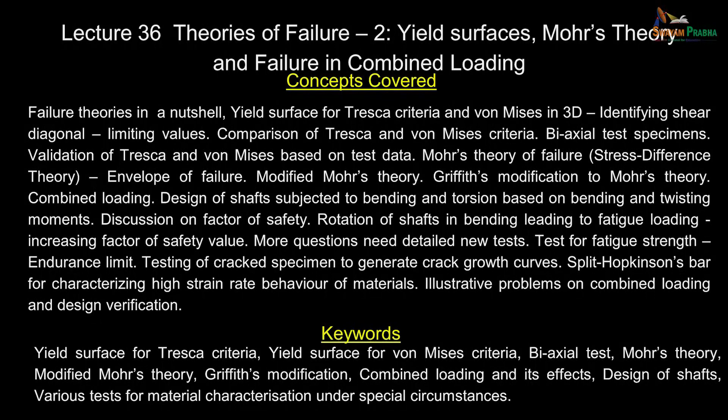Let us continue our discussion with theories of failure. You should recognize that these theories basically developed from a simple tension test. Later, people have conducted experiments on geometries where they could change both sigma 1 and sigma 2, then verified it satisfies even in a biaxial situation.

As far as brittle materials are concerned, we have looked at the maximum principal stress theory. Once you go to a brittle material, the ultimate tensile strength becomes important. There is nothing like yield strength. The material does not give you any warning, it simply fractures. And we will not try to apply maximum principal stress theory to a ductile material.

One of the very famous theories, developed very early, was the Tresca yield criteria. The way you will have to appreciate this theory is that we are monitoring what happens to the shear stress, written as sigma max minus sigma min divided by 2. When this reaches a critical value in a tension test, you go only up to sigma ys because you are pulling the specimen, and you want to see when yielding has taken place. You use that information and limit the shear stress at that stage to be the permissible one.

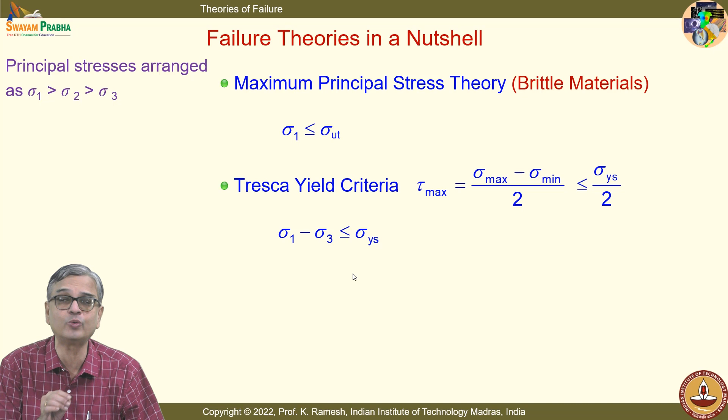So rather than sigma max minus sigma min, if you write it as sigma 1 minus sigma 3, even when both principal stresses are positive and both are negative, when sigma 3 is 0, you will never make a mistake in the calculation.

We have also seen the von Mises yield criteria, which reduces to sigma 1 minus sigma 2 whole square plus sigma 2 minus sigma 3 whole square plus sigma 3 minus sigma 1 whole square, less than or equal to 2 sigma ys square.

I have also said that the von Mises yield criteria comes basically from distortional energy theory. Later, there is the octahedral shear stress that was monitored by Nadai, who showed that results from octahedral shear reaching a maximum and distortional energy reaching a maximum reduce, for calculation purposes, to the same basic equation. This is a verification that the yield criteria has more justification, because you have approached the problem from two different directions, and both give identical results.

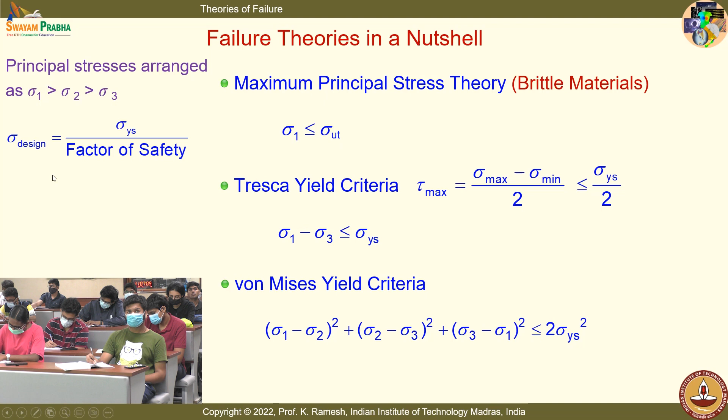Finally, when you do the design, nobody even goes anywhere near this yield strength. You have what is known as factor of safety, so you have a design strength. So all of these equations will change.

Sigma 1 should be less than or equal to design strength; sigma 1 minus sigma 3 should be less than or equal to design strength; and sigma 1 minus sigma 2 whole square, the final expression, should be less than 2 times design strength square. One of the most challenging aspects in design is how to estimate this factor of safety. There are multiple considerations that go into it.

We will discuss some of the aspects in the class today, and some other aspects when you do the machine elements course, design of machine elements course, you will have more comprehensive development on how to decide factor of safety.

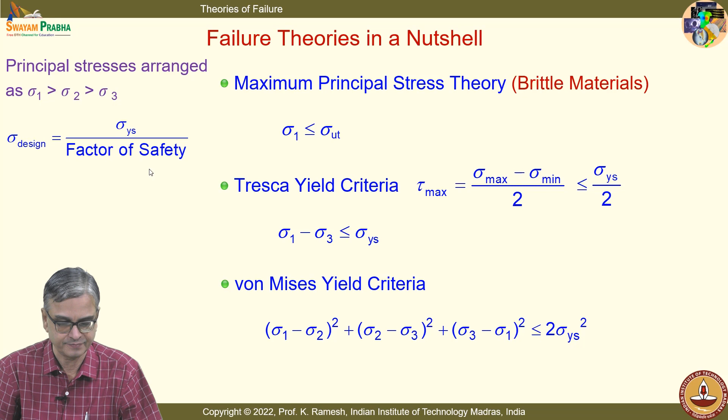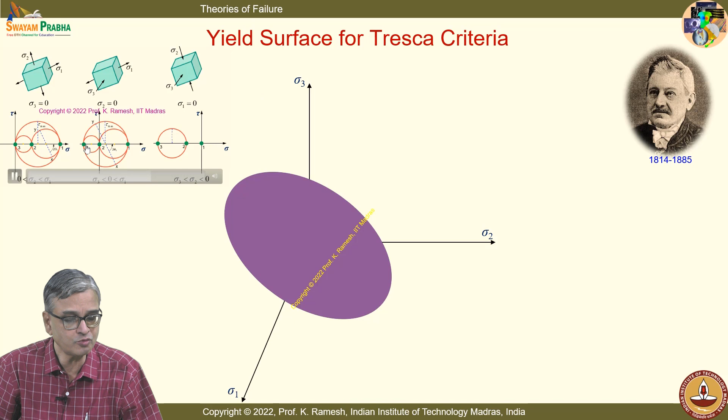You should recognize that this was one of the earliest criteria, developed in 1864. I have also been cautioning that when I have this, can I call this the maximum shear stress? You have to look at sigma 1 minus sigma 3, only that gives the maximum shear stress. This becomes particularly important when both principal stresses are positive or negative, like what you have here.

You normally ignore 0. Don't ignore 0. 0 is very important, and that is a contribution by Indian mathematicians. And with all your environment now, you want to have 0 emissions. So 0 is very, very important.

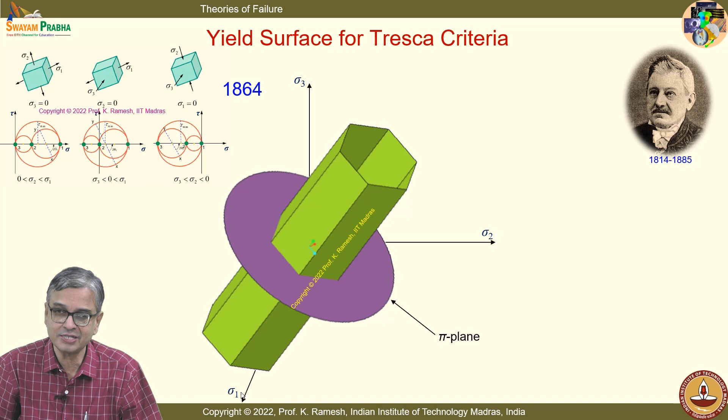One better way of understanding and implementing the Tresca criteria is to use it as sigma 1 minus sigma 3. We have also seen that you can have what is known as the pi plane, which, in the principal stress reference sigma 1, sigma 2 and sigma 3, takes the form of a hexagon. If you want to draw this, you can appreciate that by doing a simple tension test, I can find out this point.

I can find this because it goes to sigma ys. I can also keep the specimen horizontal and apply it, and I can get this point. I can also have a provision wherein I do a biaxial test - we will see the biaxial specimen. I can apply equal values of sigma 1 and sigma 2. Even in that case, because sigma 3 is 0, from the strength of this you will again get sigma ys divided by 2 as the maximum shear stress, so I can get this point. So you can imagine how the first quadrant is obtained as a limit from our simple understanding of the tension test.

And the tension test also says something about the magnitude of the shear stress. When sigma y reaches in the tension test, from your Mohr circle you can find out what is the maximum shear stress. Once you have a pure shear stress state, you can always look at it as a combination of tension and compression. We have repeatedly seen this - we used it for establishing the interrelationship between Young's modulus and shear modulus. And when we wanted to paste a strain gauge on a shaft to determine torsion, we utilized that knowledge because a strain gauge can measure only axial strain.

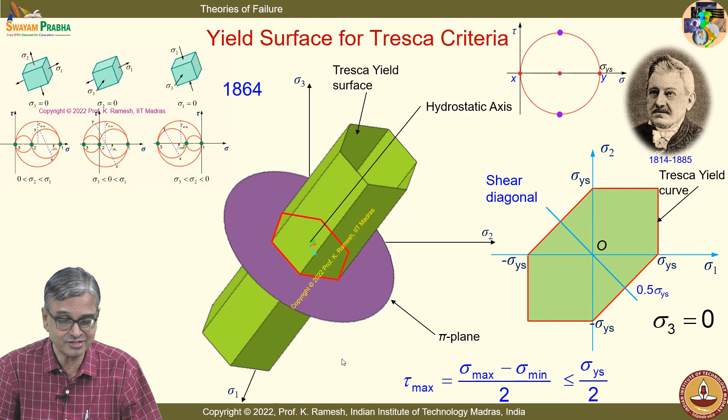We will now go and see how you get the von Mises yield criteria in a similar three-dimensional fashion. That is very interesting to see - you will appreciate how interesting nature is. And the moment you get into von Mises, there are multiple contributors. It started in 1904 by Huber, 1913 by von Mises, 1924 with a better explanation from Hencky, and then in 1937 an altogether different approach by

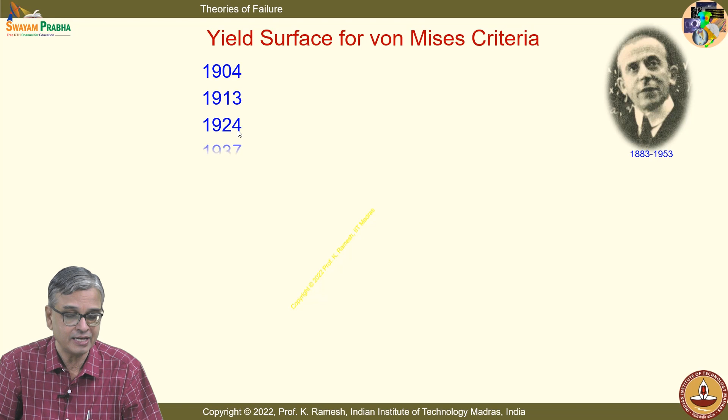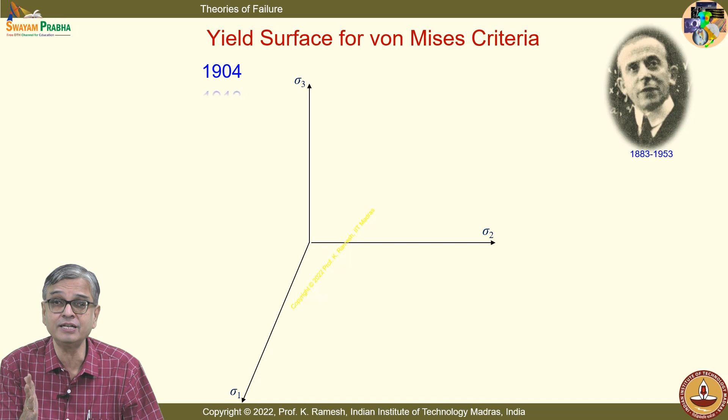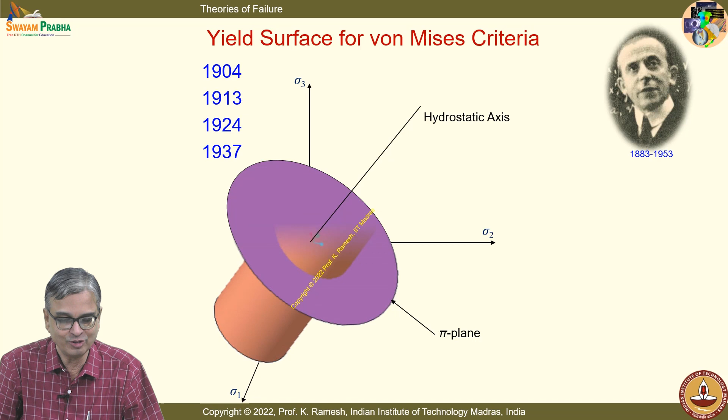Árpád Nádai, who concentrated on what happens to the octahedral shear stress. So you have multiple contributors, and if you go to historians - see, historians always go back and find even a trace of that knowledge related to the modernity, they want to give the credit to him also. You will be surprised, Maxwell also thought about a theory similar to this. And Maxwell you understand mostly in electrical sciences. In those days it is only physics - all branches of physics

come under one umbrella, and you find this von Mises yield surface is a cylinder like this, and the curve is a circle, in the sigma 1, sigma 2, sigma 3 plane. But if you put it in the sigma 1, sigma 2 reference axis, it gets elongated and takes the shape of an ellipse. So if you plot this, if your stress state is within this ellipse, no yielding is possible. If it is on the boundary or exceeds it, then yielding is definite in a given material.

See, all of these people have conjectured based on a simple tension test. You should never lose track of this. You can justify that these theories are useful only when you conduct complicated experiments, plot the experimental data, and verify whether it matches with that. We will also see that.

Now the next question is - I have shown von Mises independently, I have also shown Tresca independently, and you have seen the shapes. It is a hexagonal cylinder in the case of Tresca, and it is a circular cylinder in the case of von Mises. How do these two compare? That is also very interesting to see.

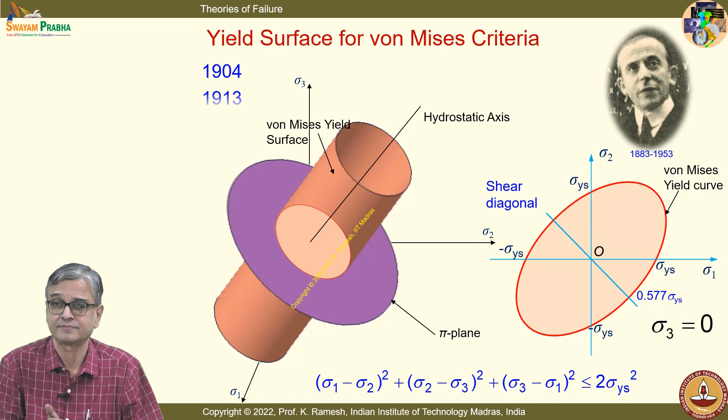Suppose I plot these two theories in one reference, you have a very interesting geometrical appearance. You have the von Mises cylinder just enclosing the Tresca yield surface. It is very interesting, and it is slightly different. From a computational point of view, Tresca was very easy to do.

You should imagine, if you have a slide rule, how will you compute? You can't compute sigma 1 minus sigma 2 squared plus so on and so forth as in von Mises, but with Tresca you can definitely find out the difference.

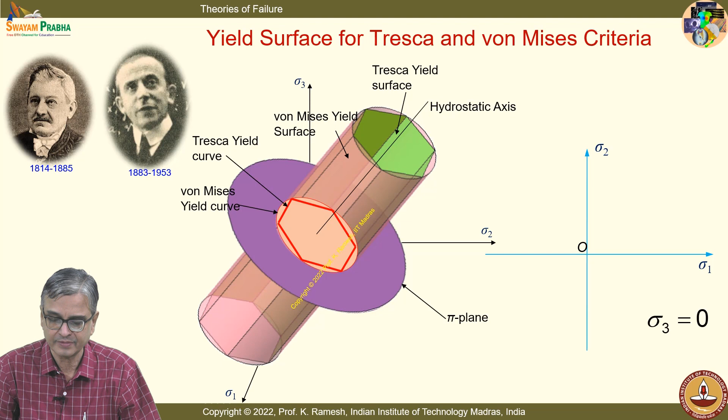So, you should also give credit, it was one of the earliest theories. I have this as a circle enclosing the hexagon, and when you see it in the sigma 1, sigma 2 reference, when sigma 3 is 0, I have this elongated hexagon, enclosed by the von Mises ellipse.

The idea is, in a real life situation with complicated loading, if you find the principal stresses, the combination lying within this elongated hexagon is predicted by Tresca, so you will not reach yield. Von Mises is slightly relaxing this, allowing a small increase, and within that, if your point lies, you have not reached yield condition, meaning you are safe.

So, this is looking at the extremum value. When you go to design, you never go near this unless you want crash protection, where you want the occupants in the car to be protected. After the accident, you want your crash bar to go out of shape and you should be in good shape, so it should absorb maximum energy. There you allow failure by yielding. In none of the practical applications do you go anywhere near this.

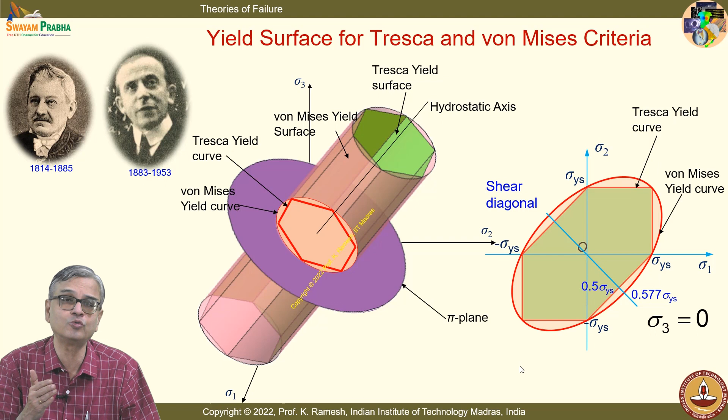Now we will also see the shear diagonal in one diagram. You will see the von Mises theory gives this value as 0.577 sigma ys, whereas Tresca gives this as 0.5 sigma ys. So, even if you do Tresca analysis, you are conservative, your failure will not happen.

These days of optimization, working on space technology where weight reduction is very important, people want to do analysis to the extent they just have material to do the intended task. That means your mathematical modeling should be very close to what is anticipated in actual conditions, and you want to optimize, you want your light helicopter. Initially they make a helicopter to fly, then they try to find out where they can reduce weight. Same is the situation for landing gears.

We have seen photoelastic coating employed to reduce weight. So, when learning stress analysis, it is not only the maximum stresses that are of concern, even the minimum stresses you want to keep at a reasonable level so that the weight of the structure comes down. So, it depends on the requirement.

So, remember this, failure theory is a substitute for good test data. If I have good test data, I would rely on that.

In the early development of jet aircrafts, I said you had big windows, and even Queen Elizabeth traveled in that, and the DGCA of US said these big windows are dangerous. There have been explosive failures of Comet aircraft. It happened even when it was taking off from Calcutta.

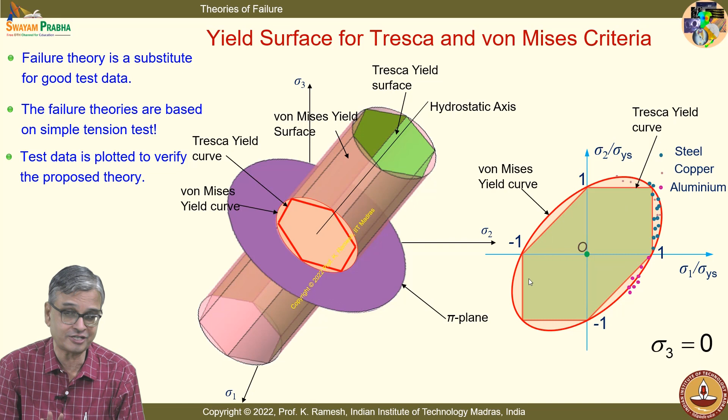None of you have told me what happens if you apply internal pressure. It is a true biaxial stress state when the ends are closed. When the ends are closed, I have PR by T and PR by 2T. Suppose I also apply axial tension, I have control on modifying sigma 1 and sigma 2. When I want to perform the test, I want to do it for a variety of combinations. Only then can I say that I have exhaustively analyzed it, otherwise not.

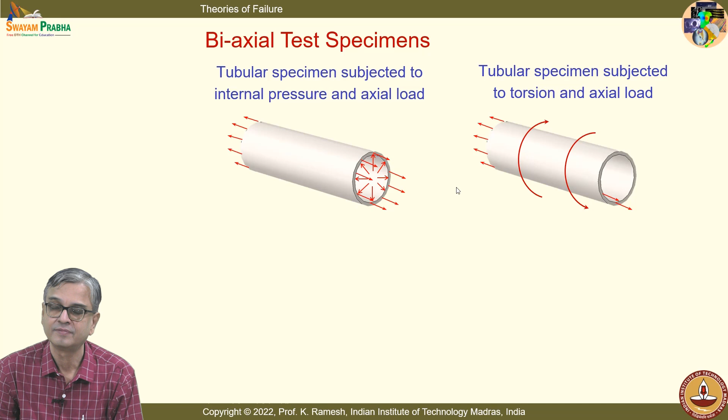You also have a tubular specimen subjected to torsion and axial load. And you also have the possibility of using a simple elliptical sheet subjected to internal pressure.

The best way to do it is a cruciform specimen. I have complete control on what I want to do with sigma 1 and sigma 2. Your test section is the inner core of the specimen, and the design of the fillet are design issues, a very subtle point, because the specimen should not fail either at the grips or at the fillets. It should fail only in the interior.

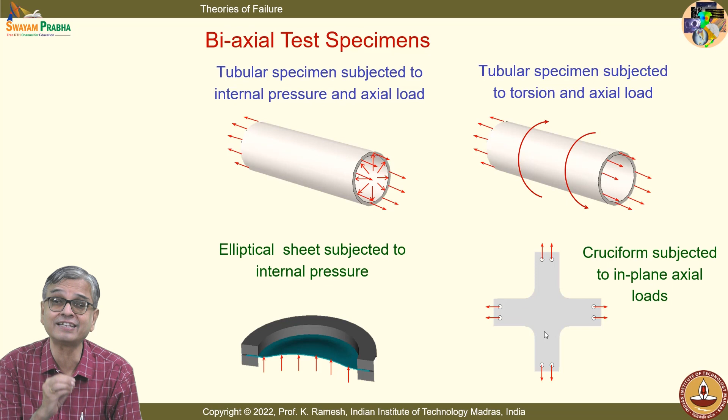People have also designed new specimens so that you can push it and find out whether these theories are valid. So you can feel safe, scientists have not had a dream and then said you follow this theory. It is all tested, verified, and reconfirmed by several bright minds over the years.

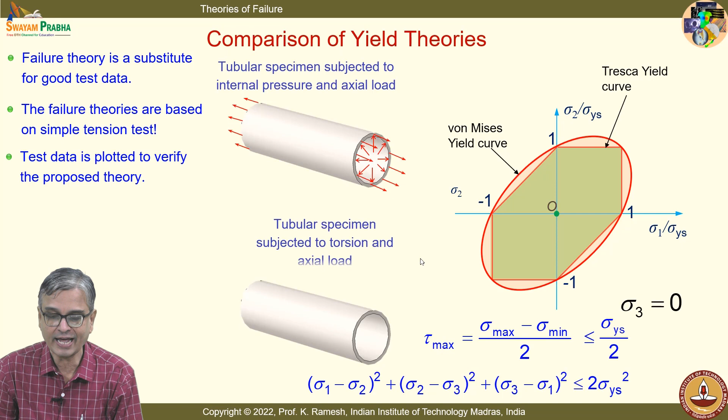So you have test data from this. I just want to give you that if you want to see what happens in the first quadrant as well as the fourth quadrant, you will have to get some tests done, very carefully, very expensively. Then you populate the data and satisfy yourself that these theories are a good enough approximation to carry on with routine design.

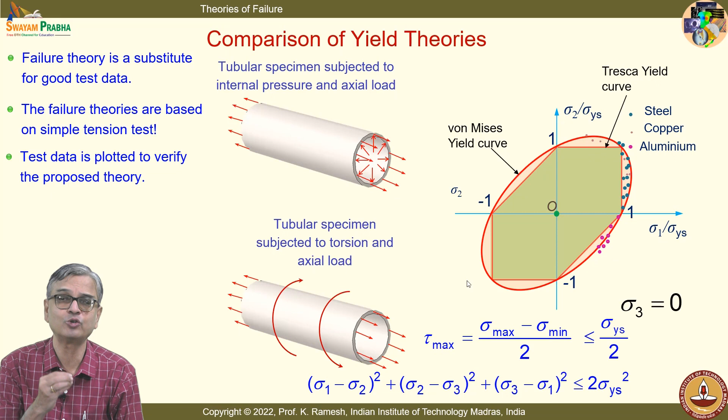For any special purposes, people do have final test rigs, very complicated, whether it is an aircraft, a car, or even a train, because India is now developing the Vande Bharat, which was known as Train 18. They have to have test rigs to test the complete bogie for several field conditions.

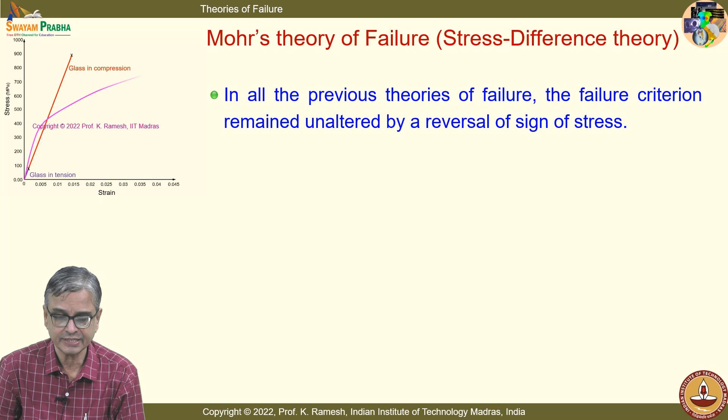We have always observed that when you have a brittle material, it can have a different compressive strength and a different tension strength, and the difference is very large. All the previous theories we looked at had a failure criterion that remained unaltered by a reversal of sign of stress, because whether tension or compression, the yield strength for most ductile materials is very similar, with no major difference. For brittle material, the yield stress is considerably different in tension and compression.

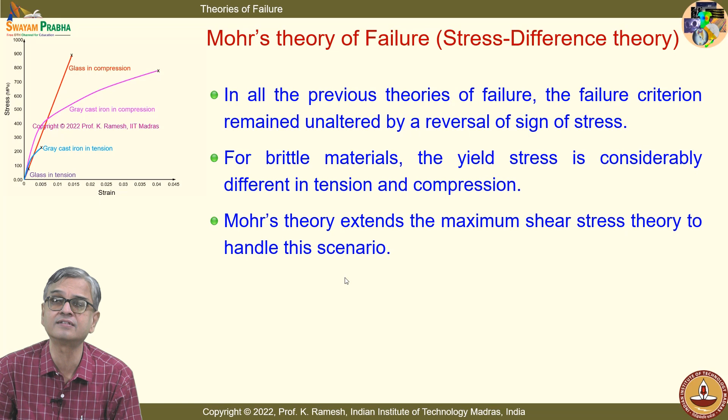So the Mohr's theory extends the maximum shear stress theory to handle this scenario. It was developed by Coulomb in 1773 and generalized by Mohr in the 19th century, so it is called Mohr-Coulomb theory as well. You call it Mohr's theory, but if you dig into the history, people say Mohr-Coulomb theory. After the development of fracture mechanics, Griffith, a very famous name in fracture mechanics, also contributed to this theory of failure.

So all these failure theories have a history. They were not developed in one day. They were proposed, verified, modified, and generalized by several scientists down the line.

When we looked at the maximum principal stress theory, we said it is credited to Rankine. Rankine's period is between 1820 and 1872, whereas Mohr's theory of failure is from 1773. That means what Coulomb said was not very clear, so it was generalized by Mohr, that is why you call it Mohr's theory. That happened probably in a period later than Rankine. Otherwise, logically, you should have given credit for the maximum principal stress theory as the theory for brittle material. People were not comfortable with this. That thinking was there even before Rankine. That is what you learn from historical records.

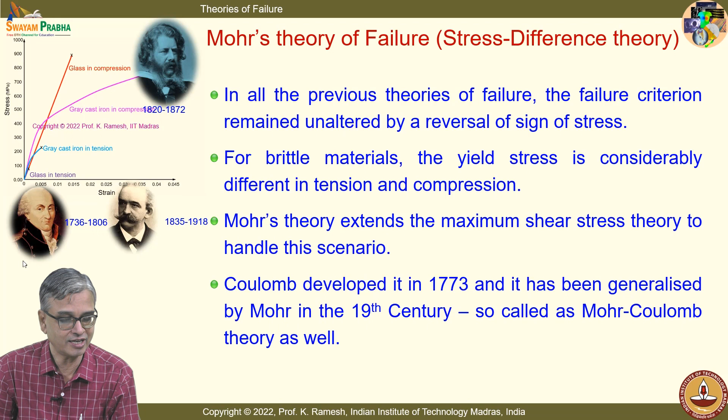And how do I plot this? If I want to plot it, I must bring in the difference in magnitudes, and what is recommended is you do a test in simple tension and then find out the Mohr circle.

You do the test on the brittle material with pure shear stress state, find out the Mohr circle, and you find out another test where you have the maximum compression. You only compress the material and draw the Mohr circle, and the envelope of all these Mohr circles tells you what failure can happen in a brittle material.

For all the previous theories also, you can draw the Mohr circle and find out this envelope. Those envelopes are simple envelopes. And if I want to plot it like what I have done in the case of Tresca and von Mises in sigma 1, sigma 2 space, I have to draw it on the screen, so I have to modulate my sizes.

If I have a simple maximum normal stress theory, it would be like a square like this. In the first quadrant you have this, and the third quadrant, which talks about compressive stress, will also be of the same size. But your brittle material does not have the same tensile strength. Compressive strength is very, very high, 13 times higher. So if I extend this...

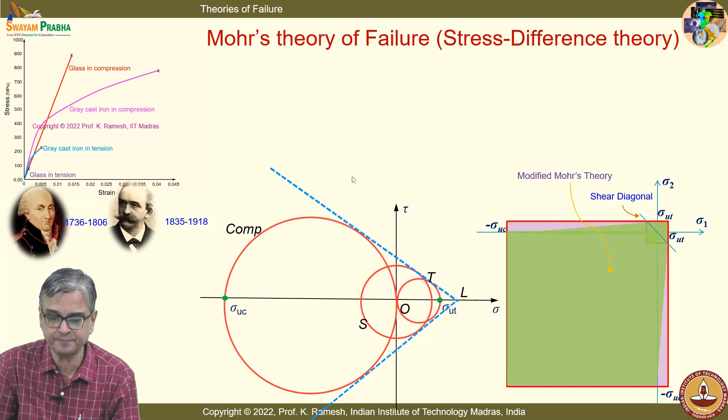So as long as your stress state lies within this zone, a brittle material will be safe. And people working with brittle materials, such as rock, have worked extensively on this.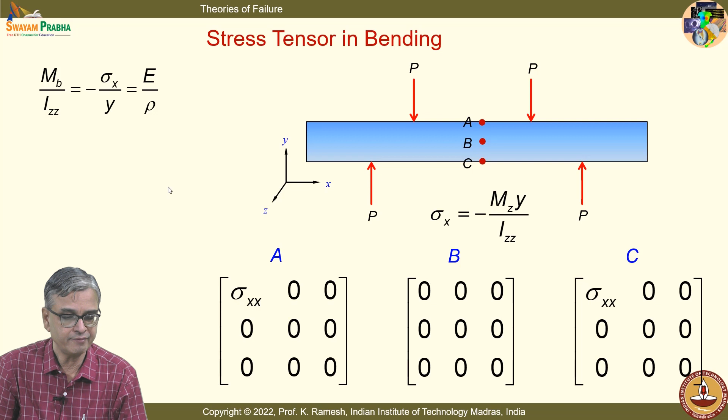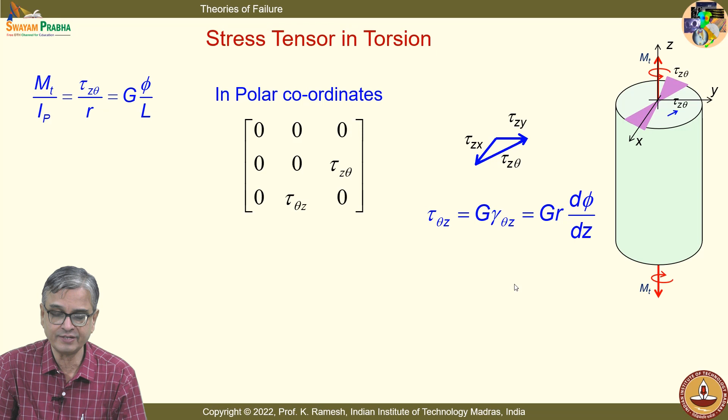And we have also seen stresses in torsion. The shear stress varies tangentially and varies as a triangular distribution. I can write it in polar coordinates as tau z theta, z theta, tau theta z. I can also write it in xy coordinates, xy z, calling the axis z. So I have this tau z theta resolved into tau zy and tau zx. In Cartesian coordinates, I have the stress tensor like this.

I have said even a simple atta chakki problem, let us see what forces come on the shaft. I have shown a generic shaft. This is not the shaft used in atta chakki because it is hollow and tapered and so on.

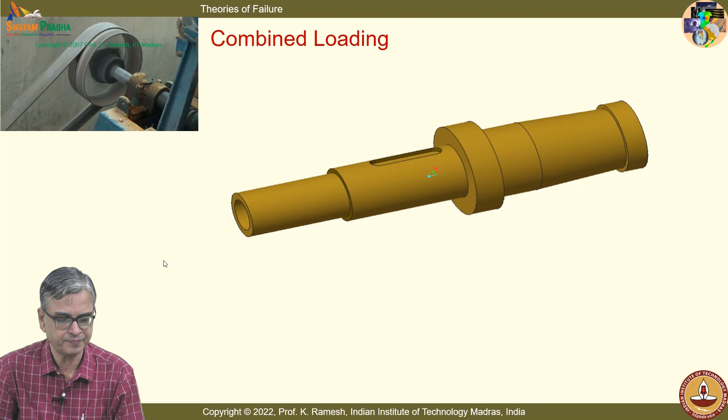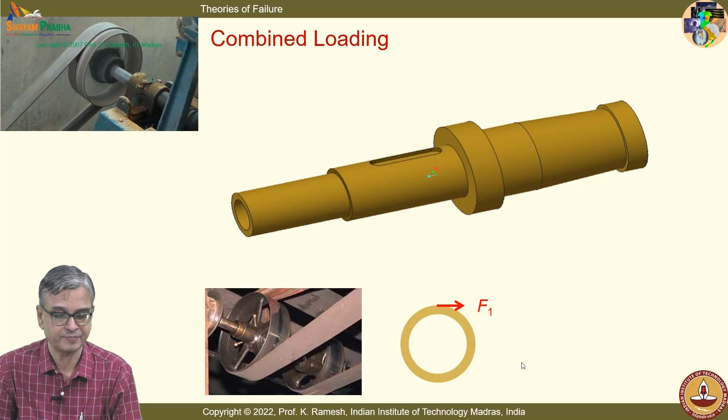When I have a belt drive, recollect what you learnt in your rigid body mechanics course. You have tensions T1 and T2, and this essentially introduces only a twisting moment on the shaft.

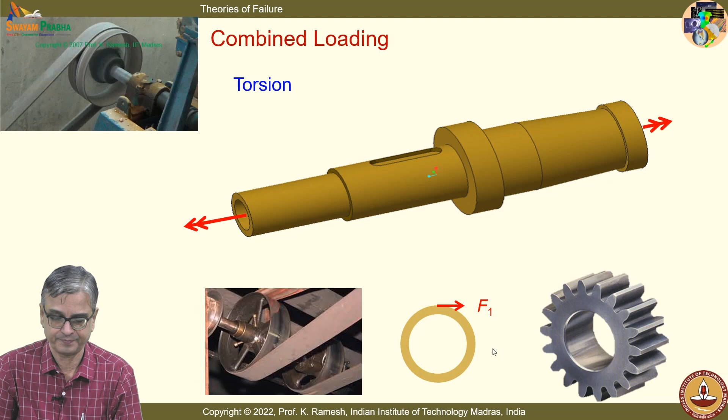Suppose I have a spur gear mounted on the shaft. With a spur gear, you have a pressure angle and the load is transferred along the pressure angle, so I will have a horizontal component causing twisting and a vertical component that adds up to bending of the shaft. Or if in the atta chakki I have a bearing, it will also give a reaction.

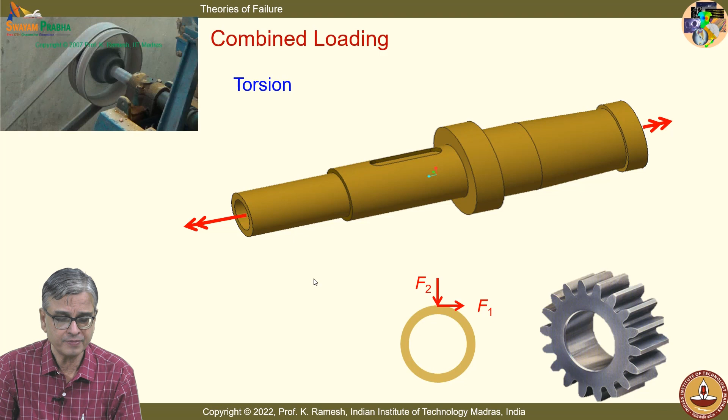So the shaft will be subjected to bending loads. Torsion and bending loads are very common in a shaft, but we have studied them separately. That is how we develop the subject.

Suppose on the shaft instead of a spur gear I have a helical gear, needed to take out power and operate something else. This helical gear will also have an axial component. So I have torsion, bending, or tension and compression. In real life, even a simple down-to-earth problem may have a combination of these loads. You never have one unique loading, but while learning the subject, you learn them independently.

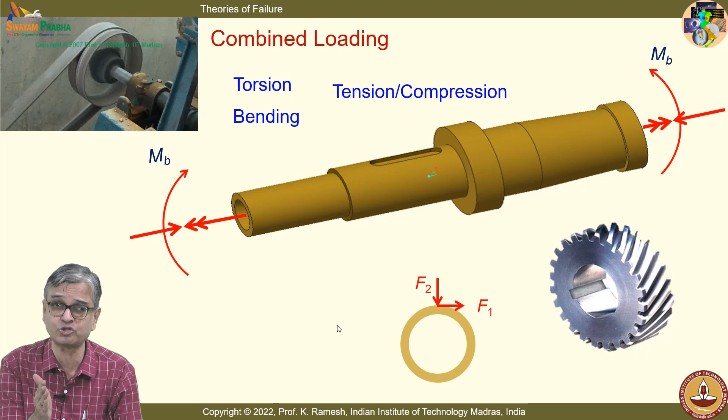And we said we are working in linear elasticity. So in linearized elasticity, I can use the principle of superposition, individually compute the stresses and add them up. We have actually solved one problem. But there is also something very interesting.

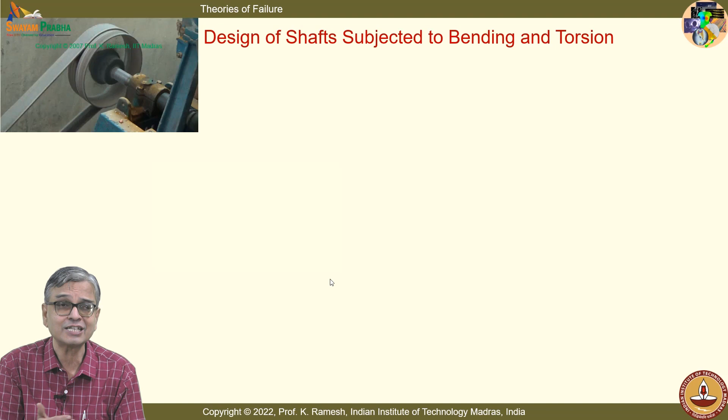Let me see how many of you have looked at it. I have a shaft rotating. I have just said the shaft has twisting moment as well as a bending load. What you learnt in your course, we solved one problem where it is prudent to understand the axis as Z and then add these stresses comfortably to get the combined loading.

So stress in case of bending, in terms of bending moment, is 32 Mb by pi d cube. Stress in case of torsion is tau equal to 16 Mt by pi d cube. And we have combined them. You remember we solved the femur problem where I showed how to superimpose.

I change my reference axis in a very convenient fashion. So if I have a shaft transmitting bending and torsion, any member transmitting bending and torsion, I can get the stress tensor in this form. I can get the magnitudes from the bending moment and twisting moment from these expressions.

Long time back, we took the example of a gem clip, and we said when I pull it out, I cannot fail it. What did I do? When I do this, I get it beautifully broken. I've given you the clue. Can you visualize what is happening because the shaft is rotating?

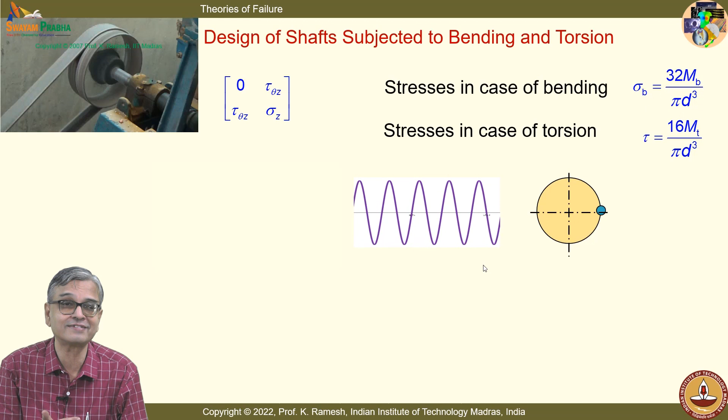So what happens? You have sigma ys in your Tresca yield criterion or your von Mises yield criterion. I can never go near this because I have innocently done repeated loading. If you do not recognize that the shaft is rotating, you would have missed this. The bending stress on the shaft induces fatigue loading as the shaft rotates.

So what is the consequence of this? It reduces the allowable stress. So you have to bring in a factor of safety which accommodates this.

See, if you ask more questions, you will have to do more tests. Okay, and once you go to a design course, you will employ this combined loading in a particular fashion.

We have already seen when I have a stress tensor like this, your principal stresses are determined like this, and sigma theta is 0. So my principal stresses reduce to a simple fashion: sigma z by 2 plus or minus root of sigma z by 2 whole square plus tau squared z theta. And we have seen all the failure theories use the principal stresses for all the further calculations.

Now, because I know expressions for this which we have developed in bending theory and torsional theory, I can directly substitute. So once you go to the machine elements course, they will design shaft based on this expression. You do not have to remember this, you can derive it.

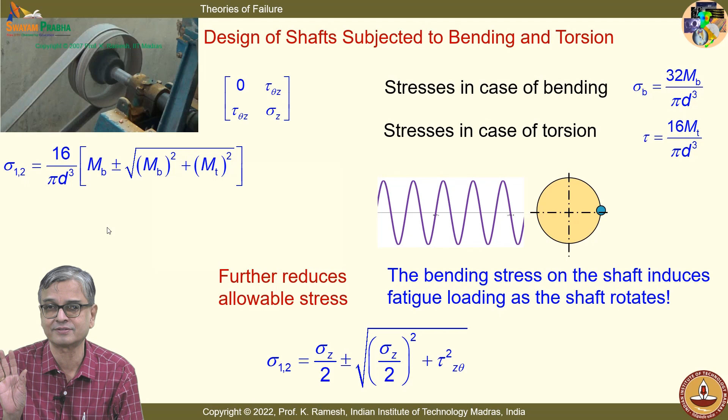So people in the field will use this; they do not have to know the theory, they have to know what formula to use. But as engineers, you should know the background.

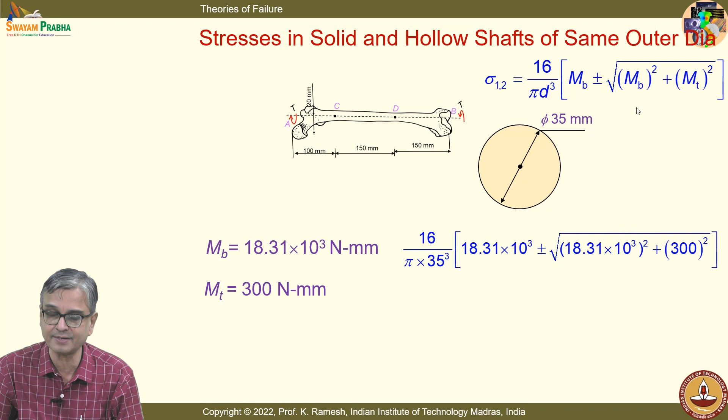Now let me go back to your femur. See, femur is basically hollow, but I want to illustrate another concept. I want to ask a question. Suppose I have this as a solid one and then I find out my principal stresses using this. I have some numbers. When I substitute this, I get sigma 1 as 4.35 MPa, and sigma 2 as minus 2.92 into 10 to the minus 4, which is almost close to 0.

Now let me ask, I want to look at the specimen which has outer diameter 35 but hollow. What have we learnt in the course? We have learnt that if you make the shaft or beam hollow, you can increase the strength. Under what circumstances? Same material or same cross sectional area.

Suppose I ask a question: when I have the outer diameter as 35, I want my hollow specimen also to have outer diameter 35. If I put the question differently, I have seen sigma 1 as 4.35 MPa. If I calculate the stresses, will they be more in a hollow shaft or less in a hollow shaft? Louder, you have to recognize that, so you understand the concept correctly.

See, femur is hollow, fine. And when I have the femur, I can simply use this expression, which I have also given. If I put the ratio of inner diameter to outer diameter here, the expression gets modified with a factor: 1 minus inner diameter divided by outer diameter, whole power 4. I get the sigma 1 value as 9.45 MPa.

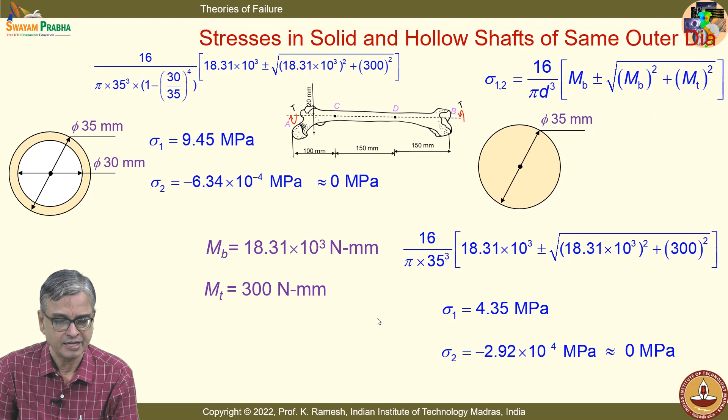And if you ask a question about repeated loading, the specimen fails. People have to design a fatigue test apparatus, keep changing the loads, and there will be a counter that says after so many cycles the specimen will break. That is all you can get from a fatigue test. It is much more complicated than a tension test. I need to have hundreds of specimens tested with different surface quality and so on. That is how people have tested.

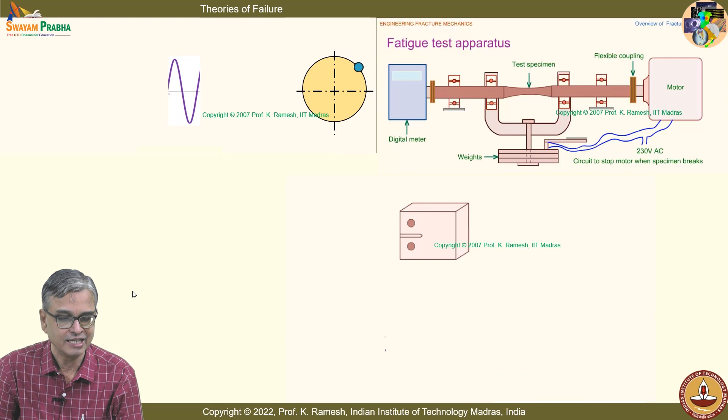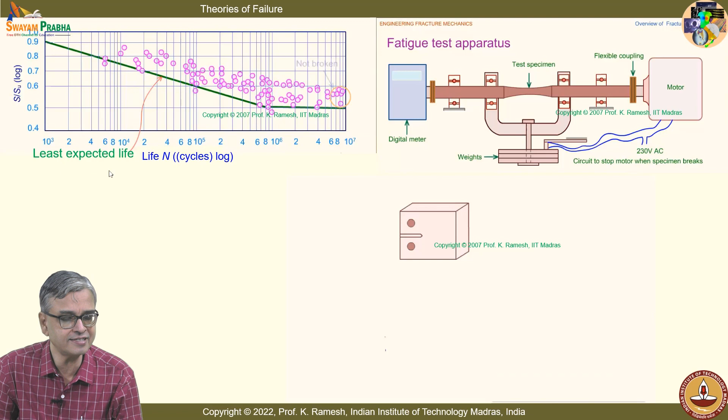And when I plot this, I have this, it goes as a fatigue loading. Just the shaft rotates, causing fatigue loading. Understand this, so now I plot this for a specimen. I will generate so many points like this from my tests, and this shows the least expected life when I apply the repeated loading. People also found that if I exceed 10 power 6 cycles, they call this infinite life, and there is something known as endurance limit.

In later courses you will study this. So if I have any repeated loading, I have to determine my factor of safety much below the yield strength. I will have a factor of safety number at least 2 when applying for fatigue loading. It will be greater than 2 if I have to bring in other aspects.

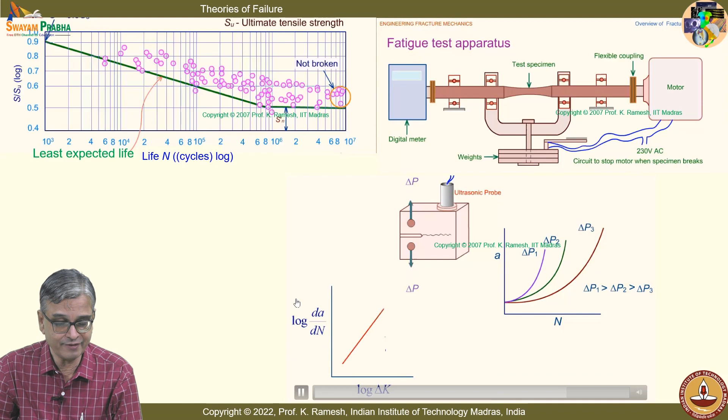Suppose I ask a question: all failures, how do they generate? You have a crack, and the crack grows on the surface and fractures. If you ask, can I monitor how the crack grows? You can't answer unless you develop another test where I have a specimen with a crack, and an ultrasonic probe to find out how the crack grows, and then I plot crack growth curves. From the crack growth curves, I post process, and then these are known as crack growth curves. You have dA by dN, log dA by dN versus log delta K, that becomes a straight line. This is known as Paris law.

Research labs spend enormous amounts of money testing materials, and no country will give you this. For defense applications, you have to develop your own material, you have to develop the testing. In fact, for LCA development, our NAL laboratory was testing such specimens round the clock for several years. So if you ask more questions, remember, you have to spend more.

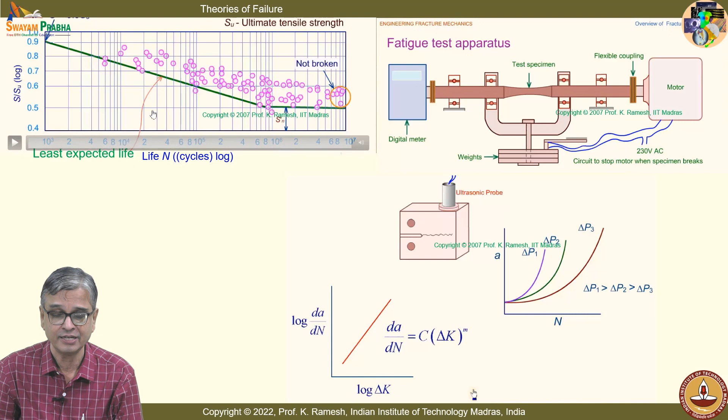If the questions do not get answered simply from your tension test, people have solved this. You have a fatigue loading, you have a crack growth, people have solved it, and we have also seen, I take a specimen with that hole, we have just seen that the stress field modifies. You have a flowery pattern, and we also learned that stress magnitudes are much higher than a simple tension test. I have not said anything more earlier.

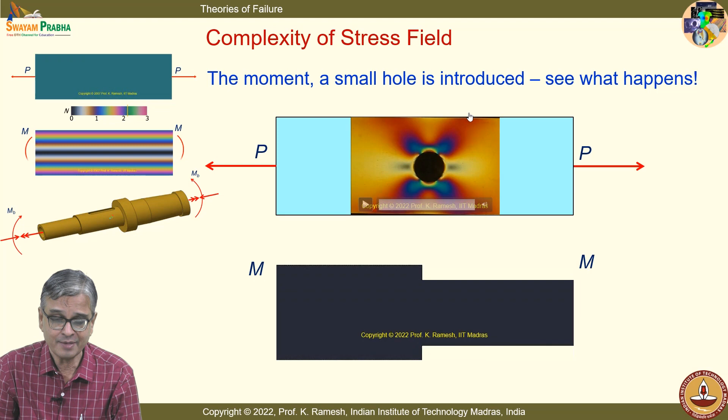Now let us look at what happens. The solution I am going to show is for an imaginary infinite plate with a small hole, whereas this is a finite plate with a comparable hole. Just an illustration. For an infinite plate with a small hole, if you plot the sigma theta theta on the hole boundary, it has a very interesting shape like this.

I want you to write this: sigma theta theta equals sigma xx times 1 minus 2 cos 2 theta. This is very important information. Where I have a density of fringes very high, I get this as 3 times the stress. Mind you, this is for an infinite plate with a small hole. For a finite plate, it can be much higher than 3.

It can even be 9 times. So you will always have to do an experimental analysis or a numerical analysis for you to get this stress concentration factor for a finite plate.

There is also something very interesting. See, I have shown a nice graph, I have also shown the sign change, I have shown something here. How many of you are taken by surprise? Don't you think you should be taken by surprise? Because I take a specimen, I only pull it. As long as I don't have a hole, everywhere I have only tension. The moment I put a hole, what happens?

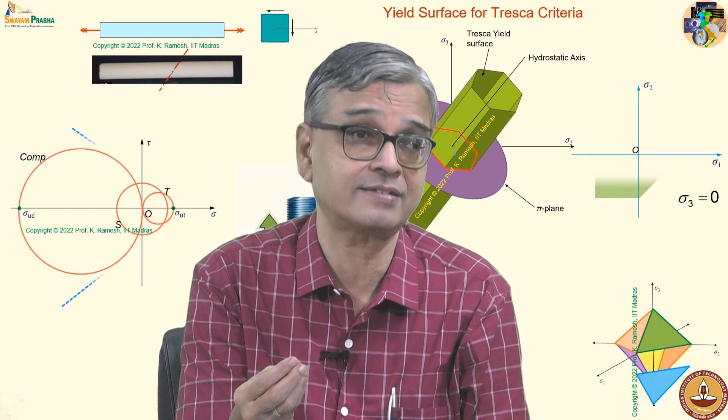Suppose somebody is supplying you material, because one of the consequences of COVID was the supply chain was affected. You are sourcing it from a particular source, then you change the source, the material property will not be consistent. See, even in your hostel, if they are serving you vada, you have this urad dal. He has to source this from the same place for you to get the same taste. Some of the good food chains are very particular about what the ingredients are and from where they source it.

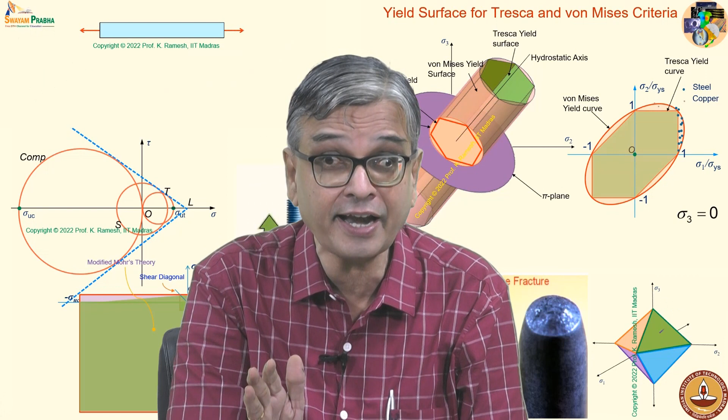Same thing applies for your automobile design also. If they are making components, they will source the raw material from the same source and test it every day. It is not like once in a blue moon they test it. Every raw material, before it is converted into actual product, they verify the properties are same.

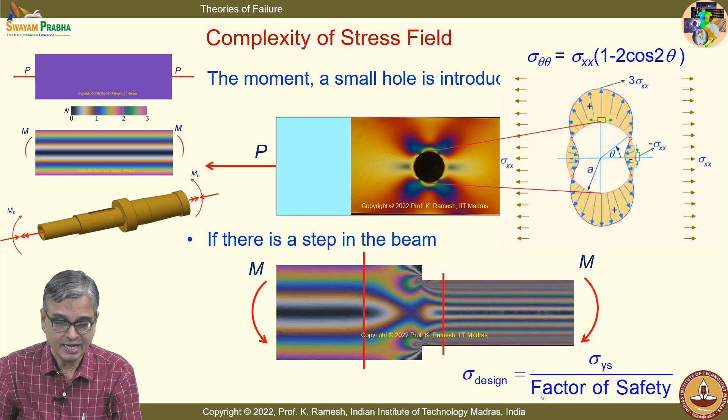Only then they pay it to the supplier. So, very important. And you know, in modern days, you have the issue of explosions. And I said, if you ask more questions, you have to do more tests. There is no other go.

Now, you have the Bogibeel bridge, which is in the Brahmaputra, which connects the northeast, 4.94 kilometers, and this is designed to withstand explosion. And you also have this Chenab railroad bridge, which they have recently completed in Jammu Kashmir. All this, you have to design to withstand earthquakes, to withstand bomb blast.

So, you ask a question, I have a high strain rate, so you need to have a different test setup. I have a split Hopkinson's bar, where I have a gas gun, which pushes this long bar, and the specimen is very small. It generates a very high rate of strain, and you have a high speed camera which records this, and you have processing of this data done.

So, the material properties change significantly at high strain rates. And also extreme conditions - if I want to work in cryogenics, it is becoming very important in space technology. And if you want to design a gas turbine, efficiency goes up if I work at high temperature.

So, the tension test what you have done is at room temperature. So, you have to conduct tests at high temperature or low temperature, generate test data, and material scientists play a very important role. So, all that goes into your design.

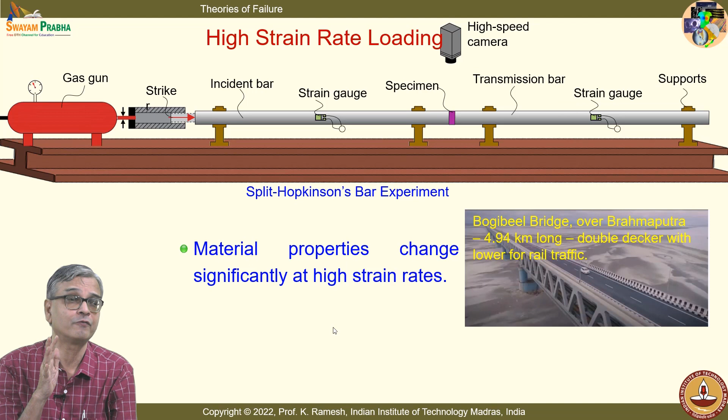And we will also see two simple problems. The first problem is very simple, to remind you that if I have a simple tension member, the geometry of the cross section has no role to play. You have an allowable stress.

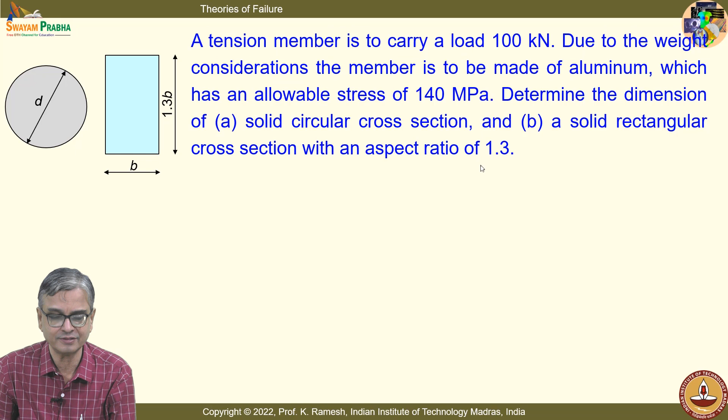Now, I said we are not going to work at yield strength. Somebody has done the requirement analysis and said what should be the factor of safety. So, he has said for this material you use only 140 MPa, and you are also given what should be the geometric shape of the rectangular cross section. Aspect ratio is given as 1.3. It is a very simple problem.

I have always said that once you have a problem, learn how to write the stress tensor. It is a tension, so I have the sigma y. The value given is 140, and you have the simple criteria: allowable is force divided by area. You have an expression, a requirement, and when you translate into a circle or a rectangle, you are in a position to find out what should be the diameter of the circle or the distance b for a rectangular cross section.

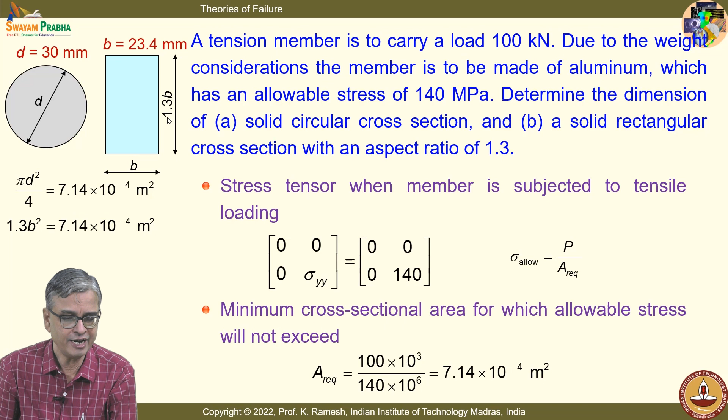A very simple problem. The purpose is to illustrate that when I have axial tension or compression, geometry does not play a role. And you know, many practical problems are compressors - you have your pressure cooker, your Indane cylinder, your aircraft. All of these are pressure vessels, and pressure vessel is one problem where you have a true biaxial state of stress.

And you have a thin cylinder approximation. You have learned the ideas when I have a thin cylinder, how this gets stressed. So, here the idea is how do you write the stress tensor and then find out the limiting values. So, first check is you have to see whether the design is safe.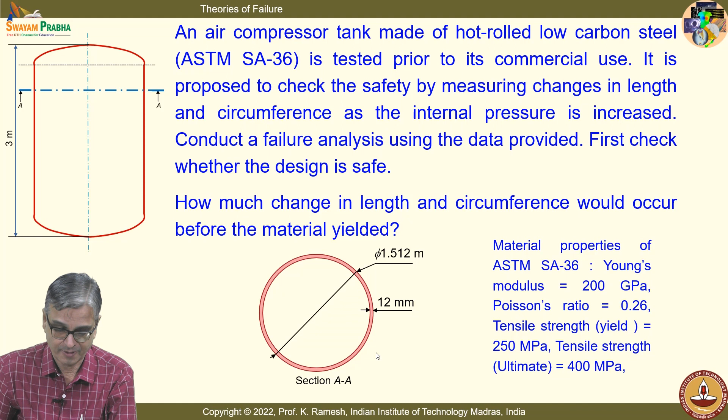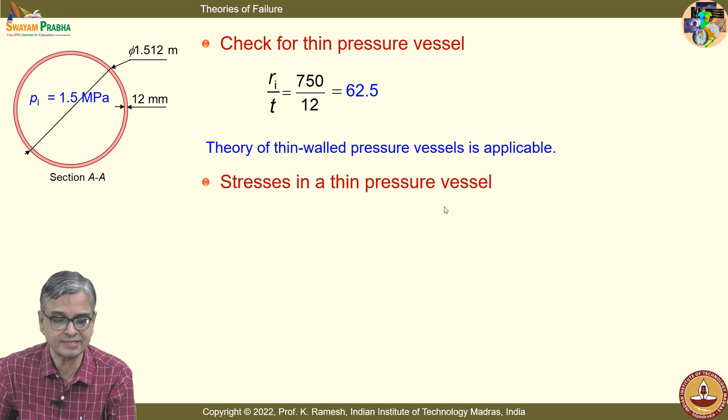First, you have to check for a thin pressure vessel. It is obviously a thin pressure vessel, since the ratio is greater than 10, about 62.5, so the thin pressure vessel assumption is applicable.

You know the stresses in a thin pressure vessel: there is a hoop stress. Usually when doing the calculation, they use the median line. PR by T is the basic expression, and instead of the inner radius, you put Ri plus T by 2. That is one convention generally used.

So I have this, and I can find the longitudinal stress even without calculation. You can say it is one half of this, because it is PR by T and PR by 2T. We have labeled this as sigma theta and sigma z.

Your radial stress is only the internal pressure. We normally say that it is very, very small compared to these numbers, so we take that as 0.

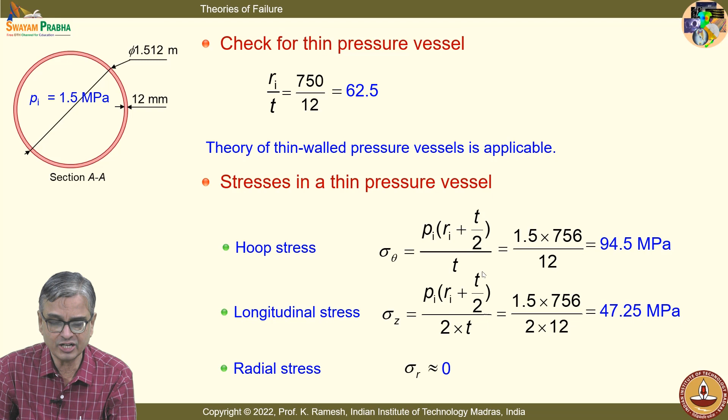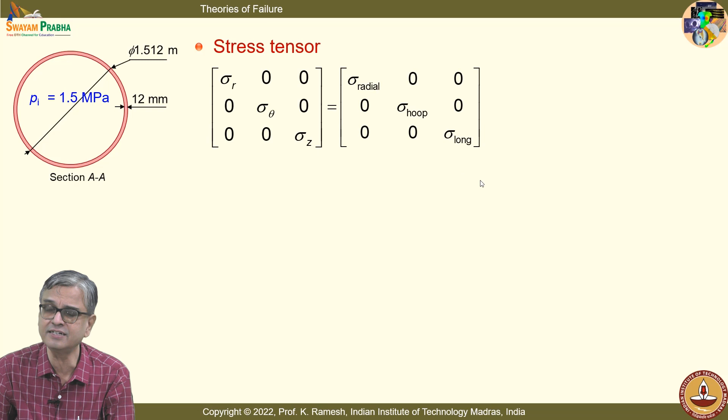And you learn how to write the stress tensor. When I have the stress tensor, it is like this. Fortunately, all of them are in the diagonal.

From the design perspective, we want to look at what is algebraically maximum and algebraically the least. So how do I write this as principal stresses? Can I have this as radial, hoop and longitudinal? It is not exactly this, but hoop stress is the maximum. So this becomes sigma 1, this becomes sigma 2, this becomes sigma 3.

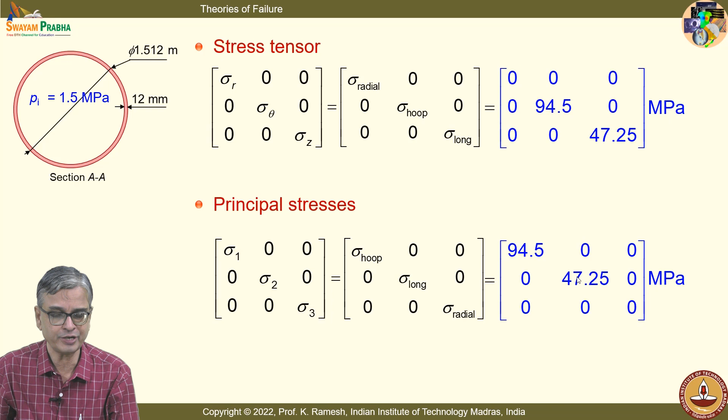Then you simply apply your failure theories. The computations are very simple. I have the von Mises criteria. You write the von Mises criteria in the basic form, substitute these numbers, and you are in a position to calculate this and check whether you should use 250 or 400.

In this case, either way it does not matter numerically, but conceptually you have to use the yield strength appropriately. And you have the maximum shear stress criterion.

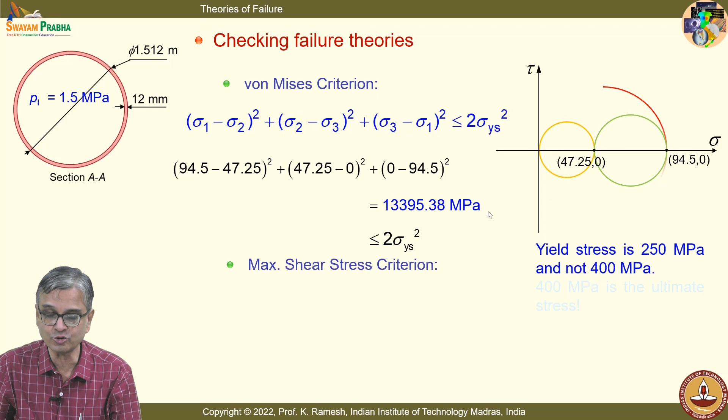Here you will have to recognize that if you look at only PR by T and PR by 2T, you will get only this Mohr circle, and you will be tempted to use this as the maximum shear stress. Please do not fall into that trap. You must recognize the existence of 0, recognize that you should draw the larger circle, but you will never make a mistake if you say it is sigma 1 minus sigma 3.

When I put this sigma 1 minus sigma 3, I get the correct expressions, and you can find out that this satisfies the yield criteria, so the material is safe.

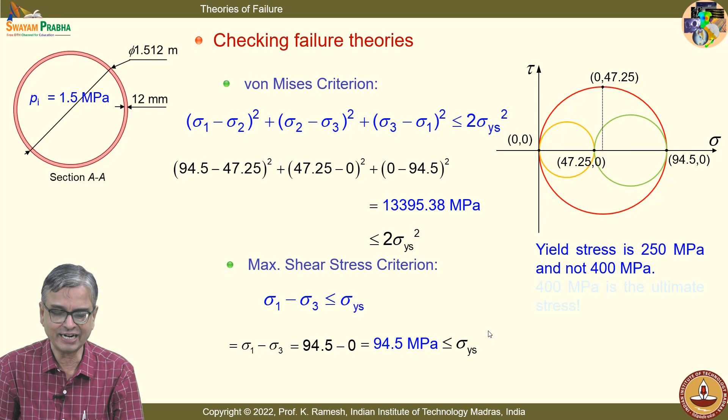In the field, what does the person immediately see? He will only see geometrical changes. That is the spirit behind the next part: what are the strains before yielding?

To make our life simple, we simply take the Tresca yield criteria. It is again an engineering decision. My calculations are very simple, and it is very close to the von Mises yield criteria. So I look at this.

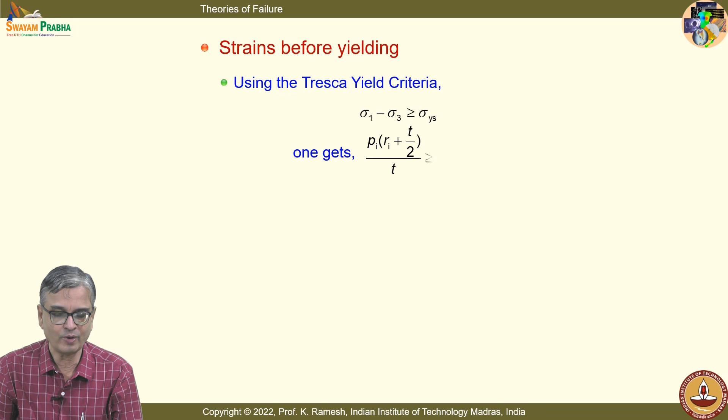Now I write the expression for strain. Write the strain expression completely, do not simply say sigma z by E. These are all common mistakes people make. You should recognize I have sigma theta and sigma r, and the Poisson ratio comes into the picture.

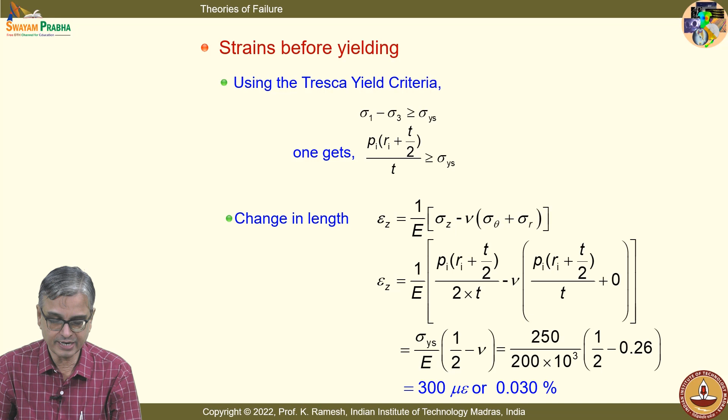Find out what is the strain in the z direction; you can easily compute this, and it is about 300 micro strain. You can also find the circumferential change. So you have the strain-stress relations; use the relations completely.

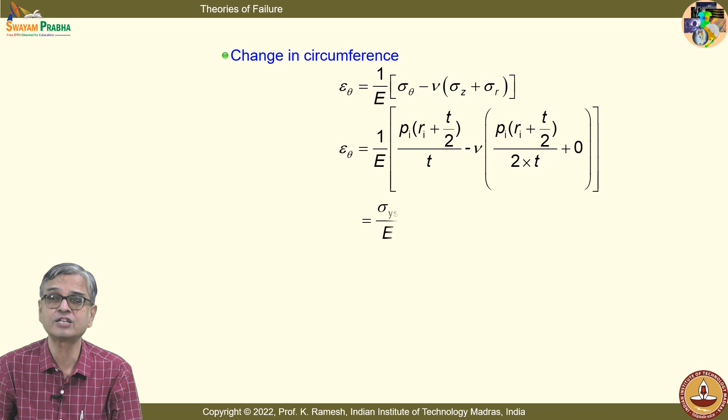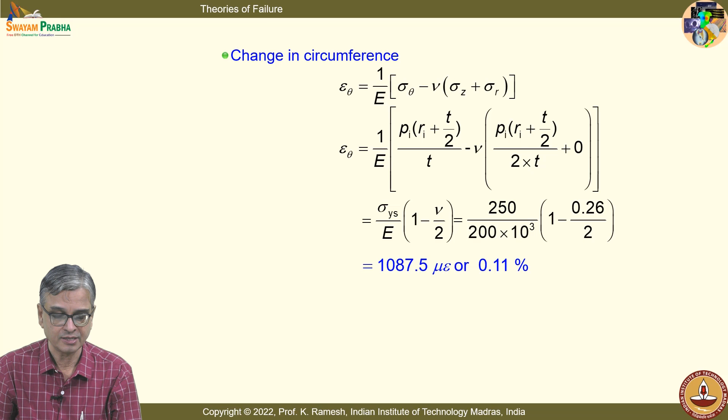Every concept that we have developed or reviewed, that is the idea behind theories of failure. You get to know how to use the concepts, and I get this as 1087.5 micro strain.

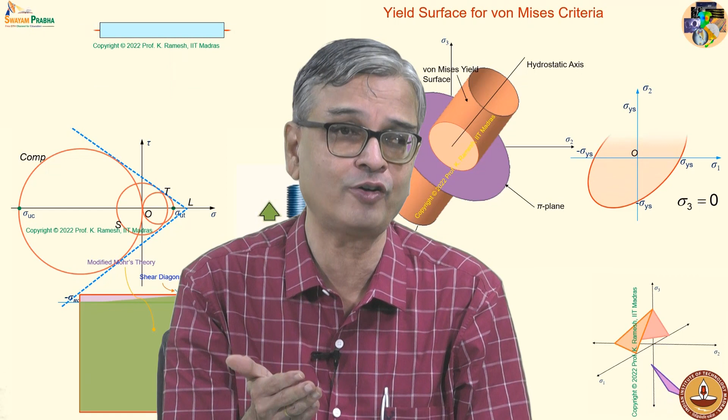In this class we have looked threadbare at the nuances of theories of failure, and we have also had a bird's eye view of the complications you face in actual design. Even a simple shaft, if it is rotating, has a surprise: it has fatigue loading. The moment you have fatigue loading, the allowable strength drastically reduces, at least by a factor of 2, and when you have a stress concentration, it increases the stresses.

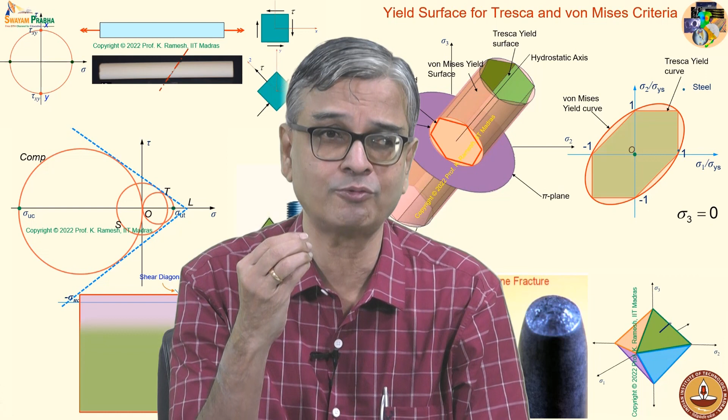You can also have a very complex stress magnitude, and you can also have surprise compression. So your factor of safety is not a simple idea; it is a very, very important idea that you have to understand how to choose an appropriate factor of safety.

We have also seen that when you have high strain rate loading, material properties change. In extreme conditions, material properties change. For all of this, you should do tests, and any test is expensive.